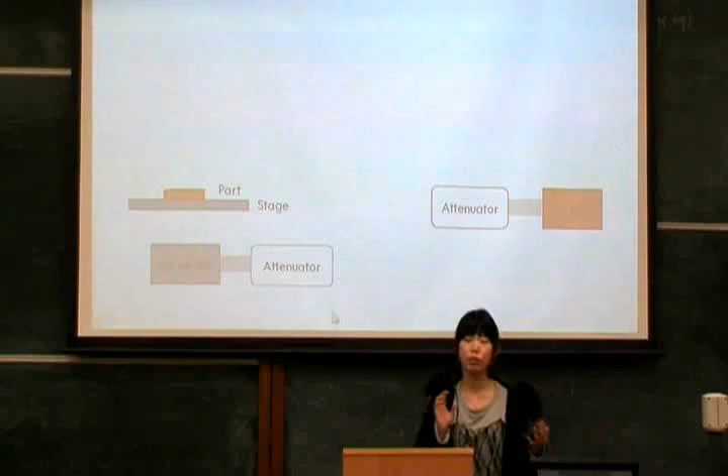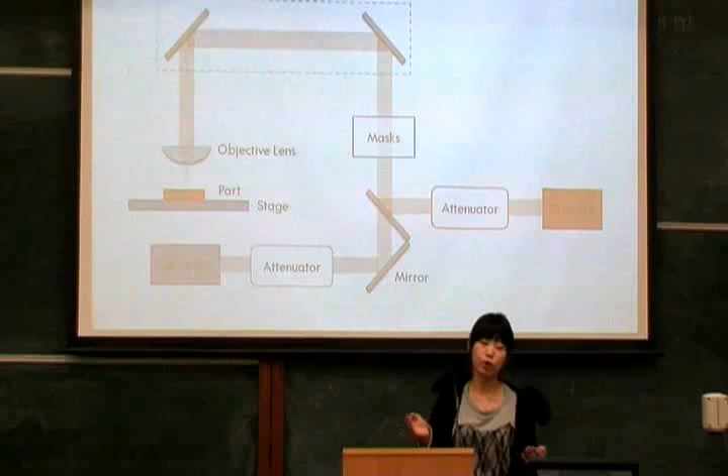So how this works is that the two lasers will go through a set of attenuators, which control the power. And then they go through a set of masks, which change the size of the beam and the shape of the beam as well. And then it will go through a series of alignment tubes and objective lenses, then finally be focused onto the parts.

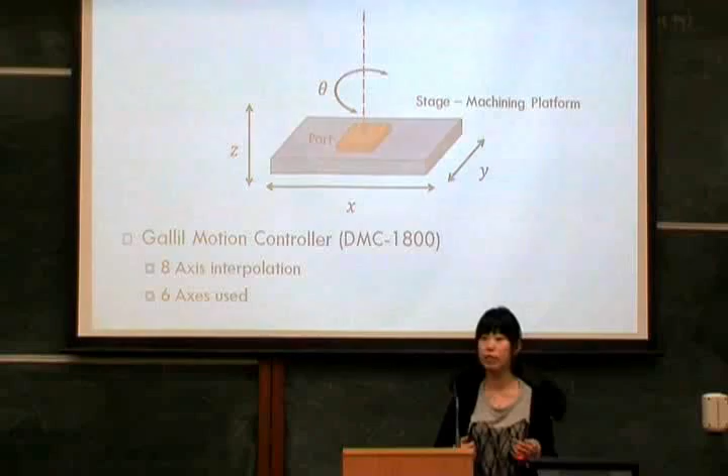And the parts will be attached to the stage, like shown here. This is our actual stage that we'll be machining on. It is controlled by this motion controller, which is an 8-axis interpolator. And we'll be using 6 of these 8 axes, which are the normal X, Y, Z axes, the rotational theta axis, the laser axis, and also the attenuator, which we also treat as an axis.

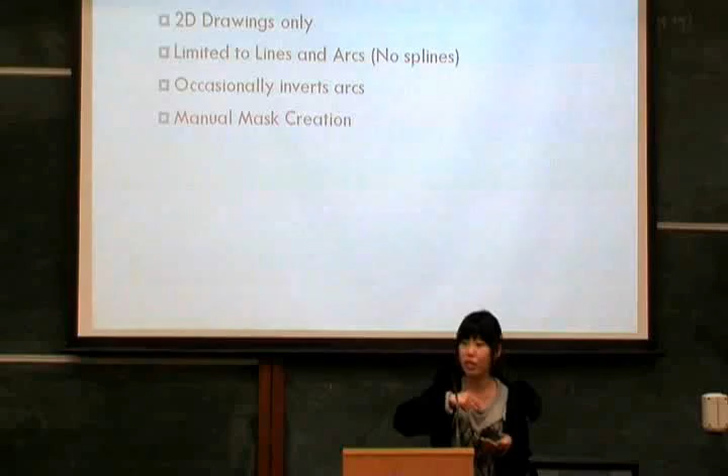And there's existing software which is produced by the JPSA company. At the moment, it only allows them to do 2D drawings, which is lines and arcs, although the arcs don't always work. And when people have to print surfaces, they have to manually put in the lines for the laser path, which is not really convenient.

So our main goal for this project is to develop this new rapid prototyping system that allows both 2D and 3D prototyping. So we're able to take in all those popular CAD file formats. And it has to be very simple to use for all kinds of users. And the overall system architecture has to be simple as well for future developers to extend on our project.

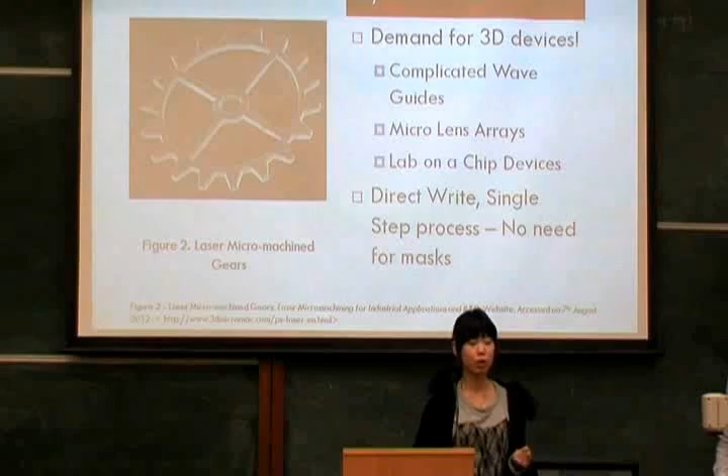So our main goal is this 3D. It's very useful in terms of producing some fine devices like this Eiffel Tower and some useful ones like gears for MEMS devices. And it should be able to do direct write, single process, and without the need for masks.

But really what we're interested in is this part here, the interpolator part, which takes in the CAD file, uses the library that we had and then displays it, and then how we transfer it to the laser where we can produce on the laser. Okay, now I'll hand it over to Josh to talk to you more about our system.

Thank you, Isaac. Just before I talk about the interpolation, I'm just going to go back and cover some more about laser micromachining. Isaac mentioned that we're using pulsed lasers. This is really important because we're not using a continuous laser beam. We're not firing a continuous laser beam down into a surface and exposing it for a period of time. Instead, we're firing discrete packets of energy.

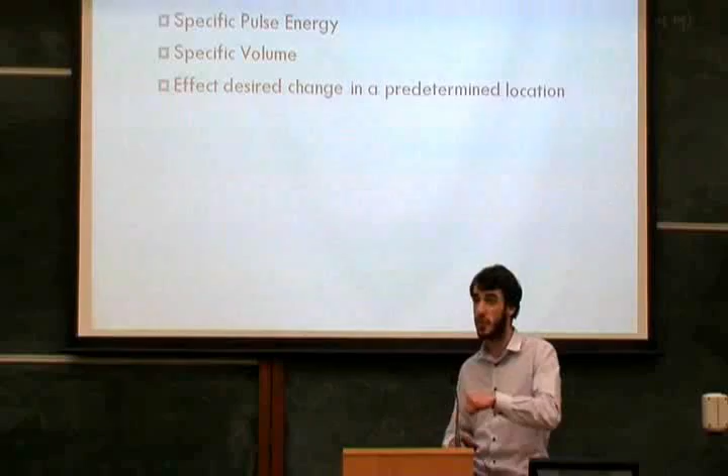We know the quantity of energy. And we're focusing these down to a specific volume. And given that we know the material properties, we can effect a desired change at a specific location. So whether that's removing a set amount of material from a surface, or whether that's changing material properties at a set volume, we know what that is, and we're placing it where we want it.

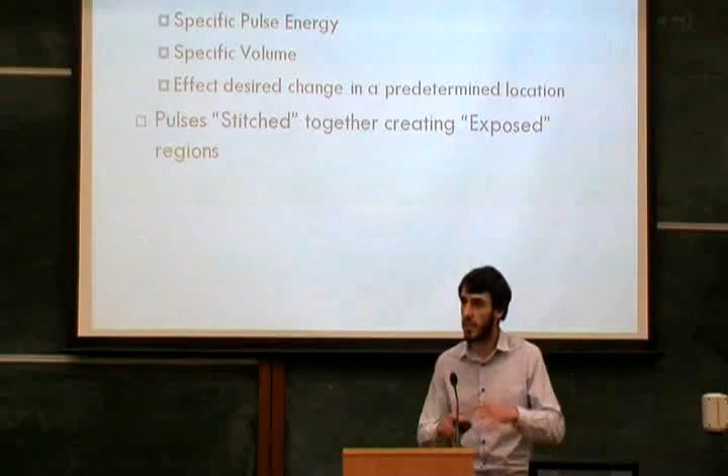And the idea is to stitch these together to create exposed regions. We can build that up as either a surface or as a solid. And so our prime objective, which was there before, was to take a CAD file and to produce these exposed regions. And one of the ways we do this is we have 2D and 3D paths.

On our system, we're restricted to straight line segments, so everything we interpolate is going to be in straight lines. And the way we do this is obviously dependent on your desired accuracy. You take your arbitrary geometry and you're going to convert that into a set of straight lines, and obviously if you do it more accurately, it's going to better approximate your end product.

Our minimum accuracy is 100 nanometers. That's the kind of scale we're working on. And we'll be able to do points, lines, arcs, ellipses, and splines, which gives us a really good cover of geometry. And the idea is that the laser will follow that path, and that path determines the exposed region, whether that's a material change, material removal, or like a change in chemical resistivity.

One of the other things we want to be able to do is take a 2D surface and hatch it according to a set of criteria. So depending on how much material you want to remove, for instance. In the past, you've had to draw these lines manually, and you'd have to change it manually if you want to change your machining settings. We want to do that automatically in a variety of different ways. We're also going to be able to do curve profiles, although I haven't shown that there, so that's very useful. And then we'll take those profiles and interpolate them into our straight line segments like we did before.

Now, obviously, we want to do 3D. We're going to do that in one of two ways. The first is intensity modulated machining. Basically, what happens is you take a focal volume that's stationary in the z-axis. In other words, we don't change the focal point of the z of the laser. We only move it in the x and the y-axis. We take our solid object and we slice it to get a series of distances in the z-axis, which we use to construct an exposure map.

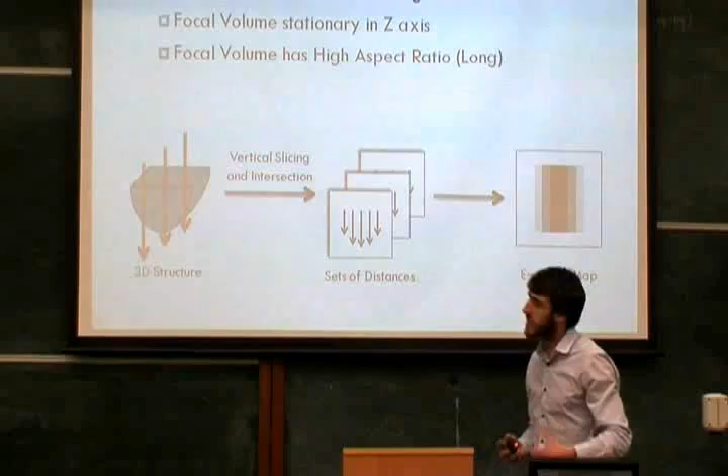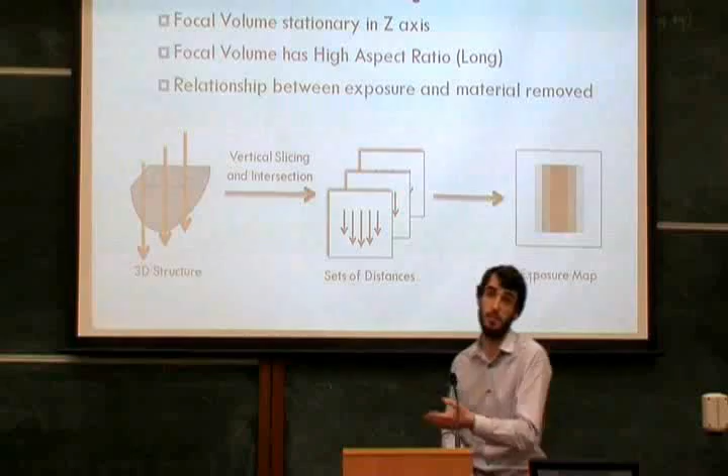Here, the focal volume has to have a high aspect ratio for us to do this. We want it to be long in relation to the size of your part. And we want the relationship between the exposure to the laser and the amount of material removed to be clearly defined. So if I fire one shot, I remove 1 micron of material. If I fire 10 shots, I remove 10 microns of material. And here in this exposure map, you can see where it's darker. That's where I want to remove more material. So we end up building a 3D structure.

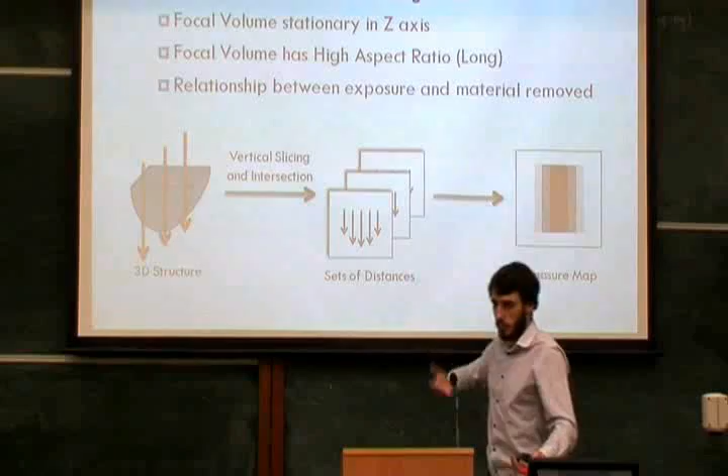So you can see then that we can only build 3D structures that we can see from the surface, from the machining angle. If we want to build a more complicated structure, like for instance an hourglass shape, we're going to have to do something different. And that approach is a layered machining approach. And the idea is completely different. We have a tight focus as opposed to this large focus. And we move the laser's focal volume in the z-axis as well. We start at the bottom, and we do a layer, and then we move our way up. And the idea is to change the property of the material so that it can be preferentially etched.

And so what we do is we take our 3D structure. Again, we slice it, but this time horizontally, to produce a series of surfaces, which we then hatch using our hatching algorithm we talked about before. And then this all boils down to getting this to the stage. And this is where we produce a motion profile. So we take our linear segments and we interpolate them with firing the laser, and we coordinate the stage motion and the laser together.

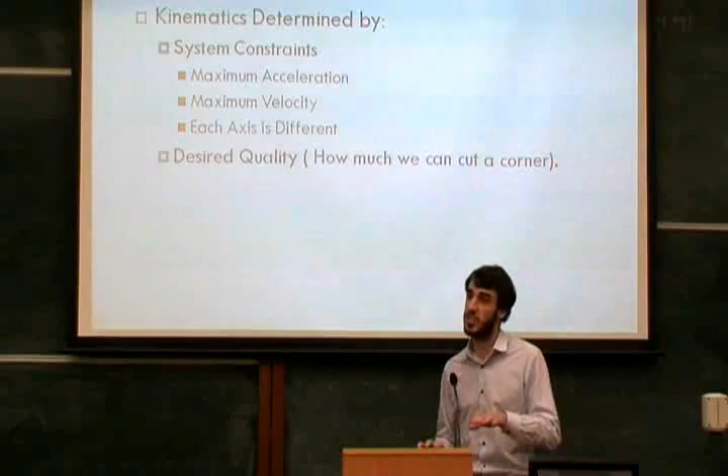And we have to be really strict about our kinematics according to different system constraints, like the maximum axis acceleration, maximum velocity that an axis can handle. Each axis in our system has a different constraint. So we have to take that into consideration when we write our algorithm. Also, we have to take into account desired quality. Sometimes overshoot is acceptable, sometimes it's not. And it's going to really affect the time it takes to machine something. And so that's important and needs to be a variable.

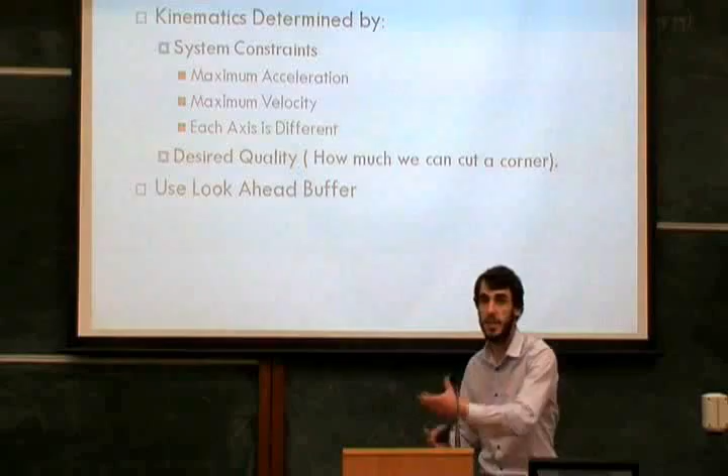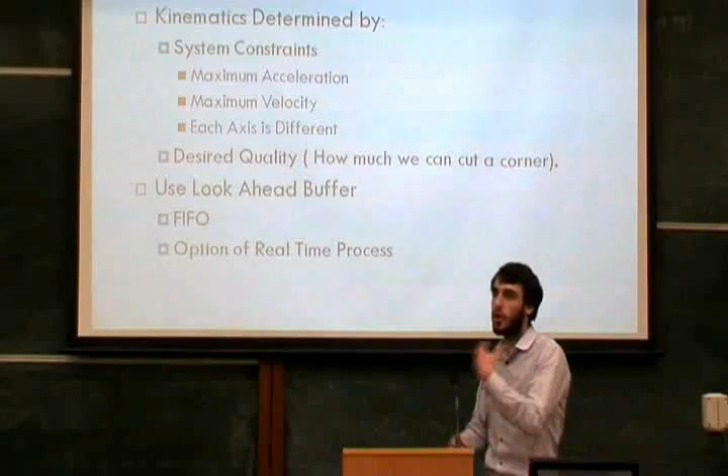We're going to use a look-ahead buffer. The idea is that you take a point and you process it, and you keep on doing this, keep on adding your points. So you take a linear segment and you add it to this buffer, and then you update the motion profile. The advantage of doing this is that you can do it in a real-time process where you send your points to the machining stage as you're processing these linear segments, which is really cool. Often we have large drawings, lots of data, and we need to be able to process that quickly.

So in terms of future work, apart from these algorithms that we've described, we're going to have a really optimum user interface because one of our main goals is having a rapid prototype system, so it needs to be easy to use. Things like machining wizards, having a materials database that suggests the best settings to use given the material that you're using. Plug-in functionality and macro functionality mean that more experienced users can add their own interfaces to the system so they can do whatever's physically possible with the system. That's our goal. So yeah, I hope that helps you understand our project.